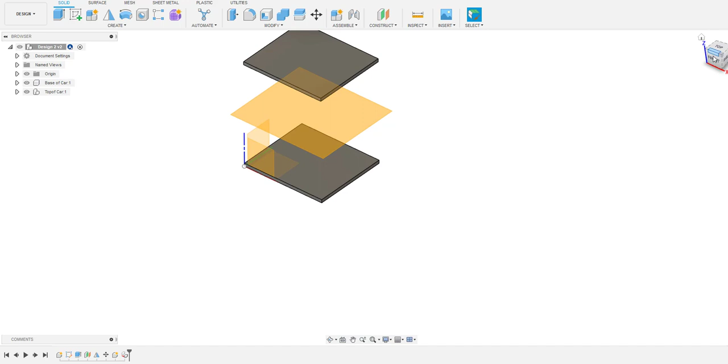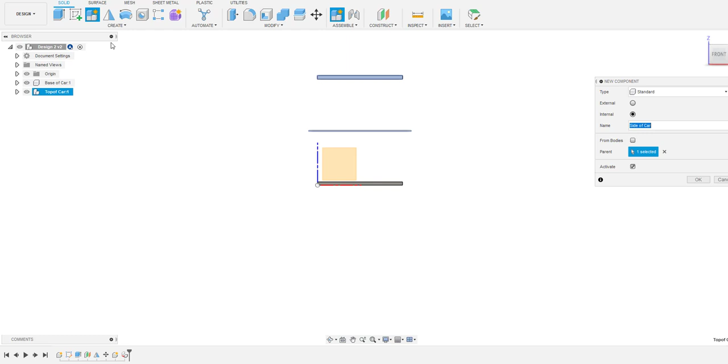Alright, so we've now drawn the top and the bottom. We've got to look at drawing the sides. So I'd grab this, I want to look at drawing it from the front on. I would look at making a new component, and I'm going to make my new component called side of the carcass. Say okay. We say okay. So we now got the side of the carcass.

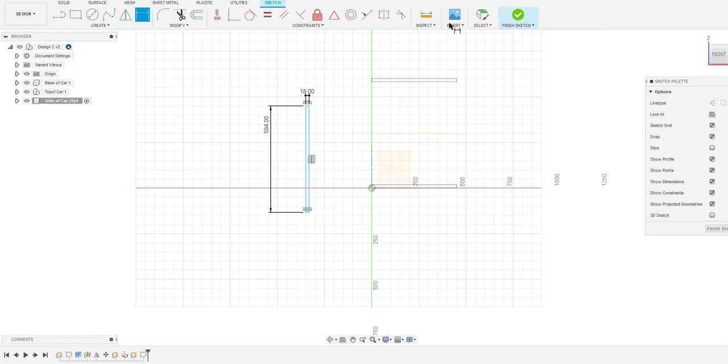Now we'll get sketching on this front view. Get our rectangle going. So the dimension sizes we need to be 18 mil by 584, so that the overall size of my job will end up being 600. When I finish that sketch and I extrude that to 400.

I'll now look at the isometric view, select on all of the drawings, and there's my top, bottom, and my side. We now want to look at using the joint tool.

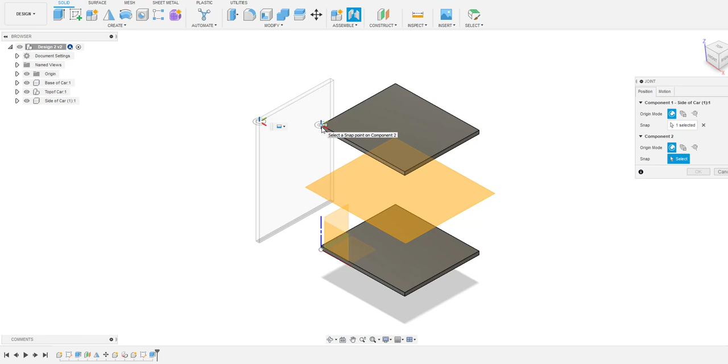So I grab that joint tool, and if I tell it even just to go right up to that corner, if I go to that front view, we'll see that I'm not quite in that corner, and I've gone too high there. So I'm actually going to send that down -8. And you can see where we are, top and bottom. And then I'm going to send it across 18. So now it's sitting inside the top and the bottom of that job.

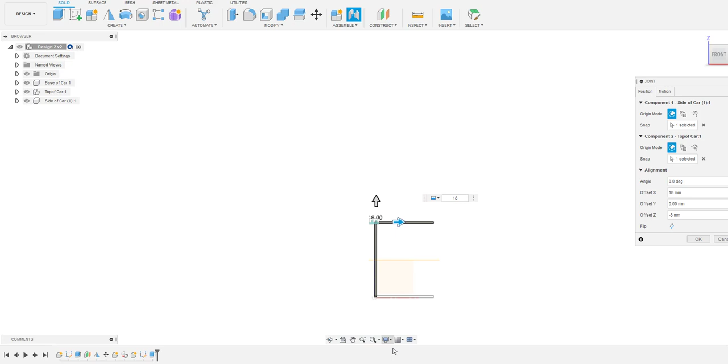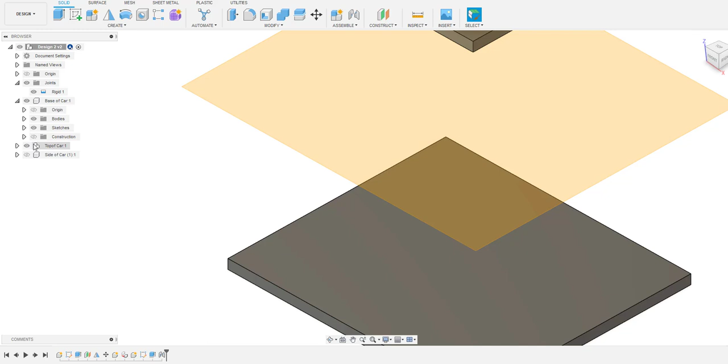So now when I press enter, I actually want to look at, if I look at it in isometric view, and I was to turn the side off, if I zoom down to these orange views, I can turn them off. If I turn off origin, if I go down to different parts of my job and turn off construction, makes it so I can't see those orange things, but that has not actually made a rebate joint. If I put it back, it looks like it's a rebate joint, but it's not.

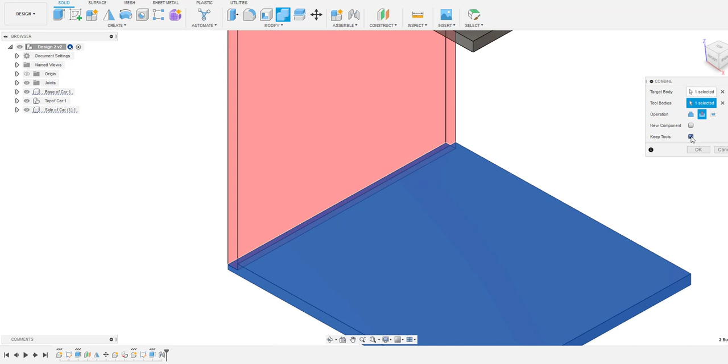But if I now look at going to the combine tool, and I'm saying that this is my target, and the tool that I want to cut away with is this side, and I want to keep the tool, so make sure it has keep tool selected, and I say OK. So if I now look at taking the side away, it's turned it into a rebate joint.

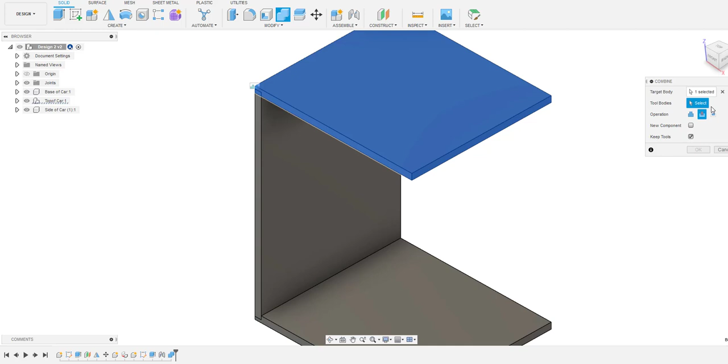So I now need to do that for the top as well. So the combine tool, so modify, and then find combine, pin to toolbar. I want to do the top, and the tool is going to be the side, and remember the last time I said keep the tool. So there we go, enter.

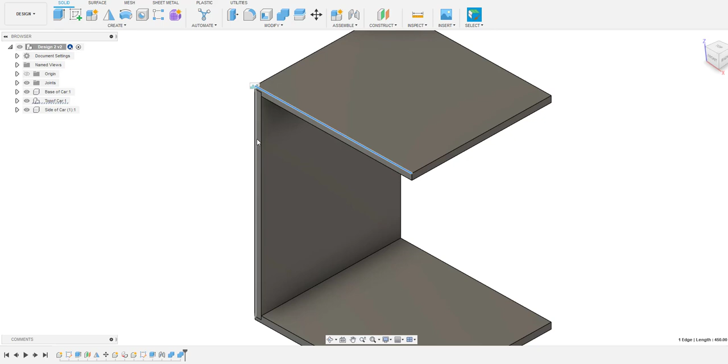I'm now going to go and make an offset plane across here. So the whole width is 450, and I've got two 18 mil widths. So 450 minus 36 is then going to give me a number of 414. Half of 414 is 207. So I'm going to construct an offset plane there at 207.

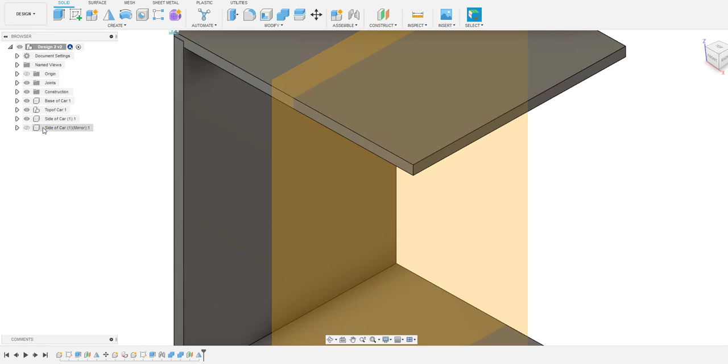I'm now going to mirror the component. The object is this, and the mirror plane is that one. Enter. It's currently not, if I turn the mirror off, it hasn't made a rebate joint. So I'm going to say combine the top, and I'm going to use that as my tool. Same again, combine my base and use that as my tool. So now if I turn off that side, it works.

I'm going to change this side to be side of carcass right. And so obviously this one here can be side of carcass left.

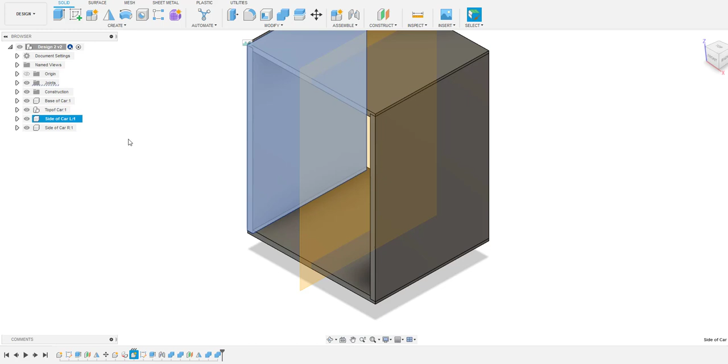So now if I go to my picture of a house, if I look at getting rid of my... where's my construction? It's in there somewhere, doesn't matter. I can live with it, but here I've drawn the carcass of my job.